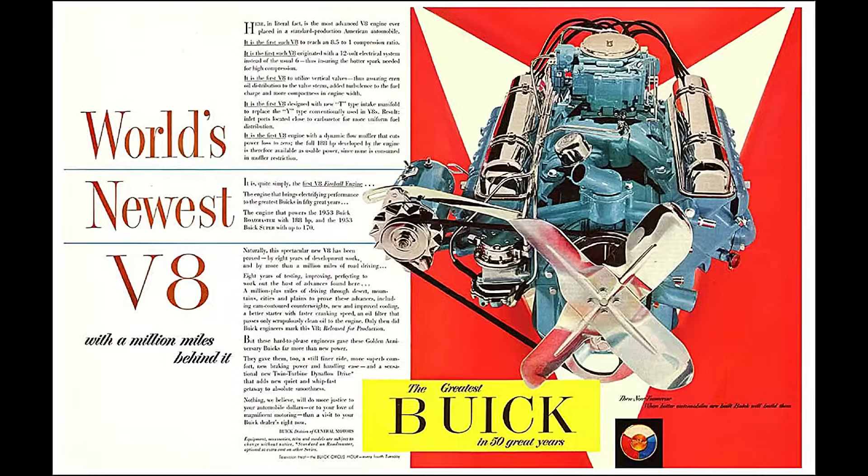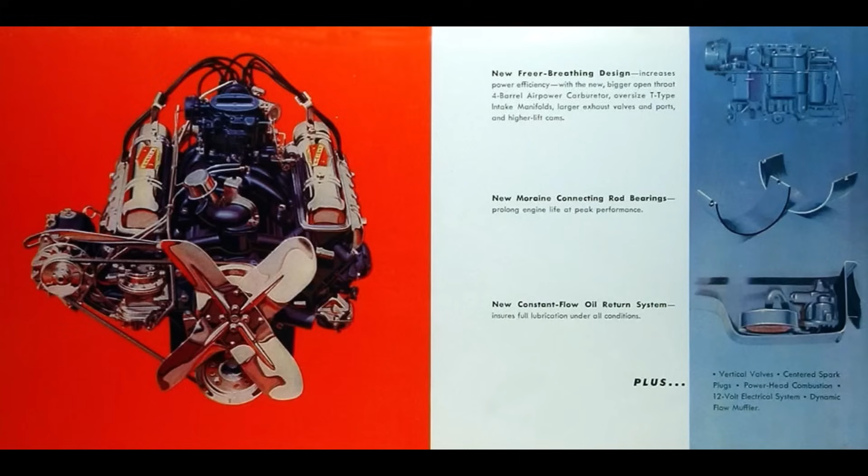The year is 1953. Buick debuts its all-new overhead valve pushrod V8 design, the Fireball V8. It would replace the outgoing overhead valve inline straight 8. This engine would eventually be known as the Nailhead by enthusiasts. In this episode, we will cover both the first generation and second generation Nailhead engines. First generation displacements were 264 and 322; second generation 364, 401, and 425.

The nickname Nailhead comes from the unusual vertical alignment of small-sized valves on the intake manifold side, originally called nail valve by hot rodders, because the valves had long stems and small heads, which kind of sort of look like nails. To offset the smaller valve size, they used a more radical camshaft from the factory with greater lift duration.

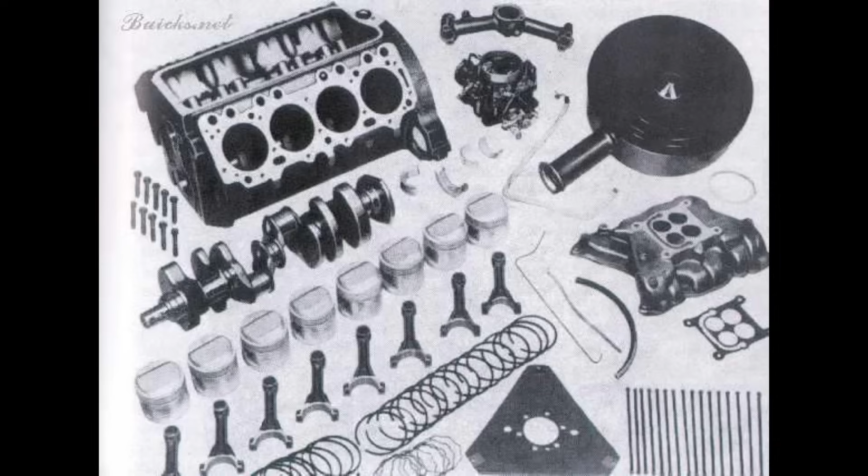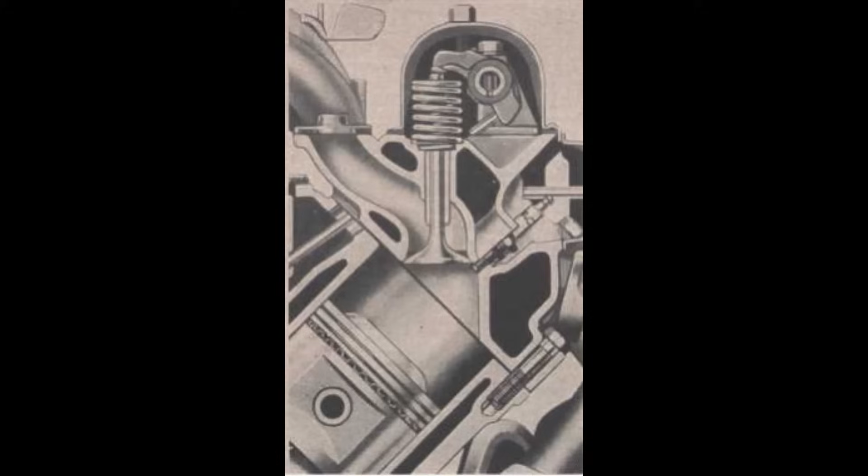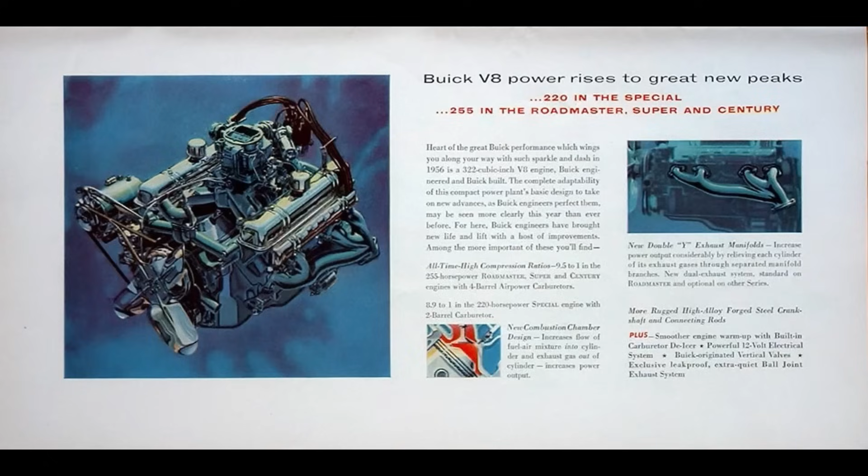Because the valves hang vertically in a pent head formation, exhaust ports had to do 180-degree bends behind the valve. They combated that with a radical cam from the factory, opening the valves early and very quickly, which overcame most of its limitations. They also used dome pistons for desired compression, forged steel connecting rods, as well as a forged steel crankshaft. This engine was also an over-square engine, meaning more bore than stroke. The unique valve arrangement made for a narrow engine design.

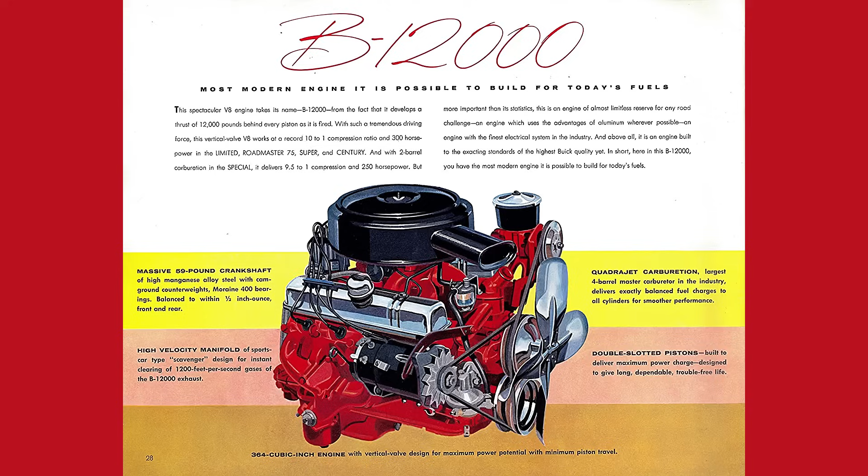These engines were capable of high torque output due to the small diameter intake runners, some exceeding 1 pound-foot per cubic inch, which was a huge deal when this engine came out. This engine design was compact and considered lightweight, weighing around 625 pounds, built of high-quality components.

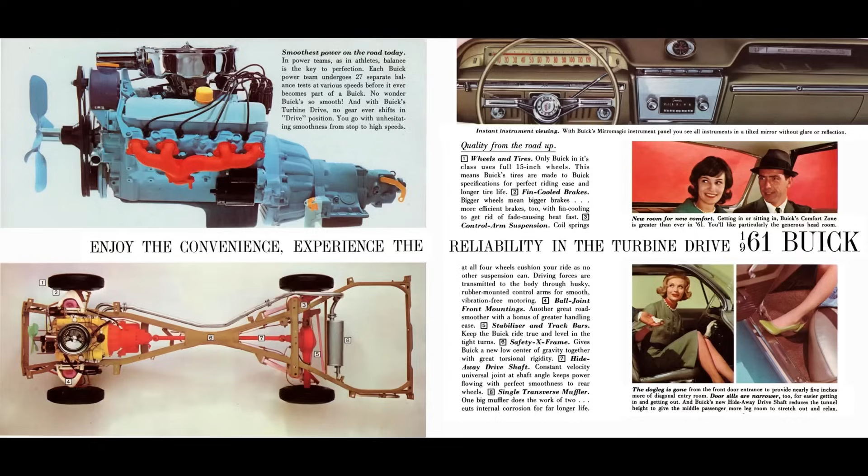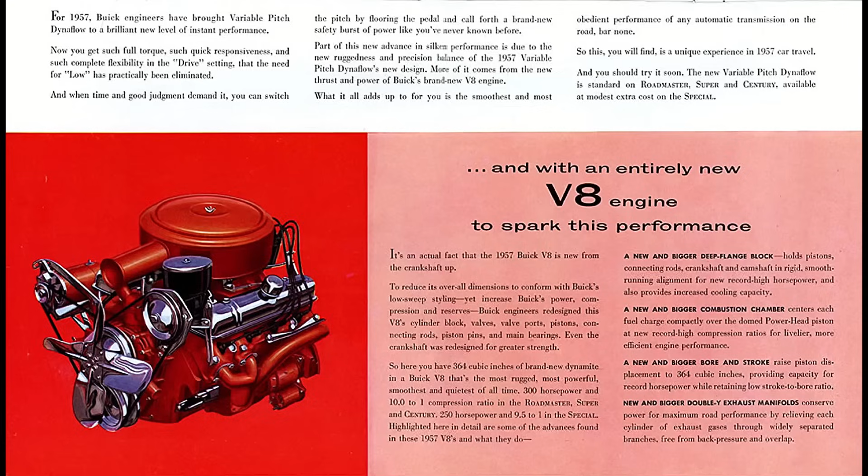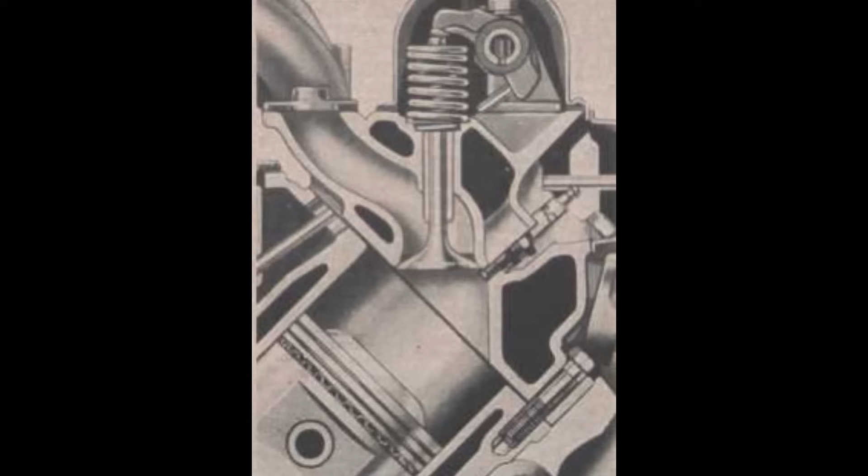Pent head combustion chambers. The Nailhead V8 used a conventional 90-degree bank angle, fully counterweighted crank, underhand rocker arms. The top of the rocker operates the valve, which is opposite to conventional. Vertical valves and central spark plug location, providing a tiny pent roof chamber. Smaller valves weren't an oversight but on purpose, and the theory was to have a tighter, more efficient combustion chamber. In other words, these engines don't rev high, but they make unbelievable torque, which is exactly what Buick wanted in their V8 design.

Introduced in 1953, the 322 cubic inch displacement Nailhead V8, 5.3 liters. It's good for anywhere between 188 horsepower all the way up to 236 horsepower in 1955. Peak horsepower came in the 1955 Roadmaster at 4,600 RPM. It could make anywhere between 300 to 330 pound-feet of torque, or 407 to 447 newton meters at 3,000 RPM, with a bore of 4 inches and a stroke of 3.2 inches. Compression was anywhere between 8.5 to 9 to 1. 5 main bearings. The years that this engine was used were 1953 through 1956.

Introduced in 1954 and used for 54 and 55, the 264 cubic inch displacement Nailhead V8, 4.3 liters. It's good for anywhere between 143 to 188 horsepower at 4,800 RPM. Anywhere between 220 to 256 pound-feet, or 347 newton meters at 2,400 RPM, with a bore of 3.625 inches and a stroke of 3.2 inches. Compression was 7.2 to 1, featured 5 main bearings. This engine was only found in the Special Series. In 1956, the Special Series would use the 322 V8, which was previously mentioned.

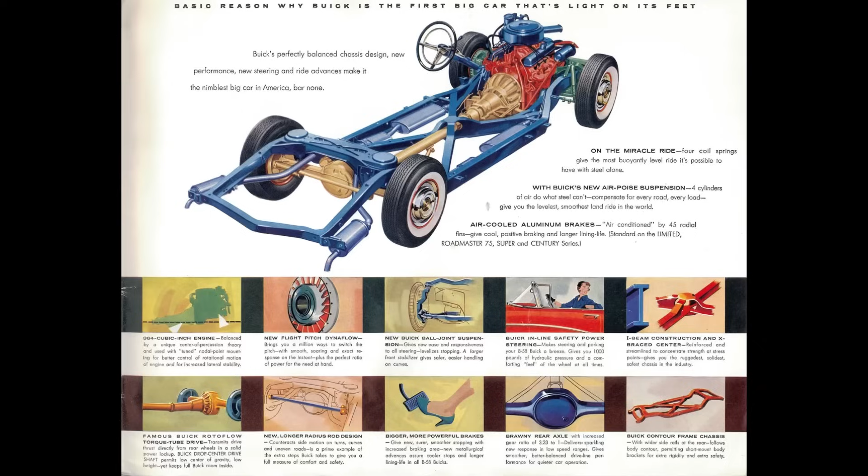The second generation of the Nailhead was introduced in 1957 and no longer used the Fireball name. The second generation doesn't share many parts with the first generation. Introduced in 1957, the 364 cubic inch displacement Nailhead V8, 6 liters. This engine was used between the years of 1957 through 1961. It was good for anywhere between 250 horsepower with a 2-barrel carburetor all the way up to 330 horsepower at 4,600 RPM, 400 pound-feet, or 542 newton meters at 2,400 RPM, with a bore of 4.1 inches and a stroke of 3.4 inches. Compression was 10 to 1, featured 5 main bearings.